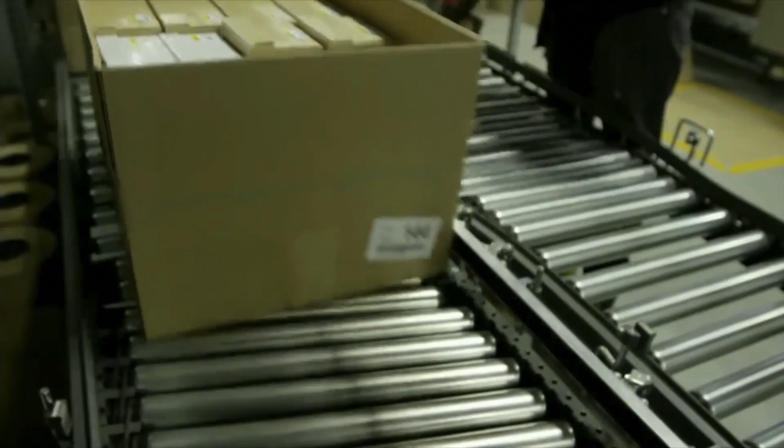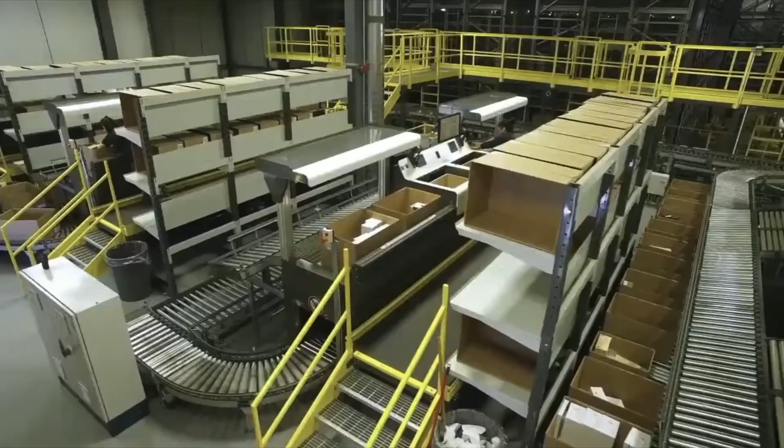At Browns, I'm the supply chain director. I take care of transportation, distribution center activities, as well as all of the e-commerce. Browns is a family-owned business. Last year, we just celebrated our 75th anniversary. We operate under the B2 and Browns banners. Overall, we have just over 1,200 employees. I think that every Browns employee is very proud to work for a company that donated 10% of its pre-tax profit year after year. In 2014, we were at the point where we had 3 warehouses. All 3 of them were at full capacity. So as a company, we decided to invest in a new facility. One of the things we looked at was a state-of-the-art automation system.

All right. Thank you, Alex, for when you watch this later. So that was it. Basically, oops.

We go back. All right, so a little bit of context about the project. So Brown Shoes, like he said, new facility in 2015, a nice distribution center and headquarters, and they have implemented their first ASRS, so automated storage and retrieval system, which is basically an automated warehouse for storing all the products. And you'll see the word OSR pop up in different places in this presentation. The OSR is basically the same thing as an ASRS. It's just a branding thing from their equipment provider.

So picking stations, that's what we are focusing on here, so goods to person. Basically the products, all the shoes, are stored in big cartons in the ASRS system, and then depending on whether they're fulfilling a web order or a stores order for a certain number of different specific SKUs that they need, this system will call the proper cartons that come all the way to the picking stations.

They move up, and then they just scan the right box, put it in the other box, and it goes out for the actual order to the destination. And that's, in a nutshell, what this is about. Now, what happened between Brown Shoes and SimWell: we started in 2018, actually. We built the first model for them.

It was another simulation software, actually, at the time. It was focused on just the picking stations themselves, and it was already an interesting project at the time. We actually used it as well for a simulation competition in the past, as it was a nice case.

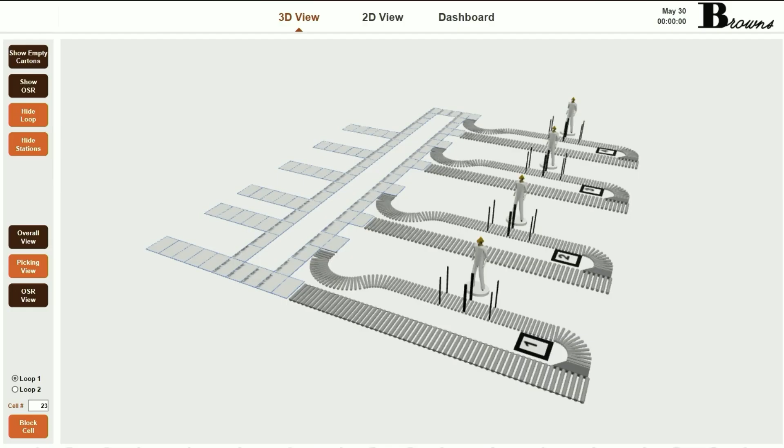And then we can also use the cloud/model manager for experimentation and sharing the model with the client, which he has enjoyed a lot until now. So we'll go with an overview of the system. Okay, so this is a video of our model here. What you see for now is just the picking stations themselves.

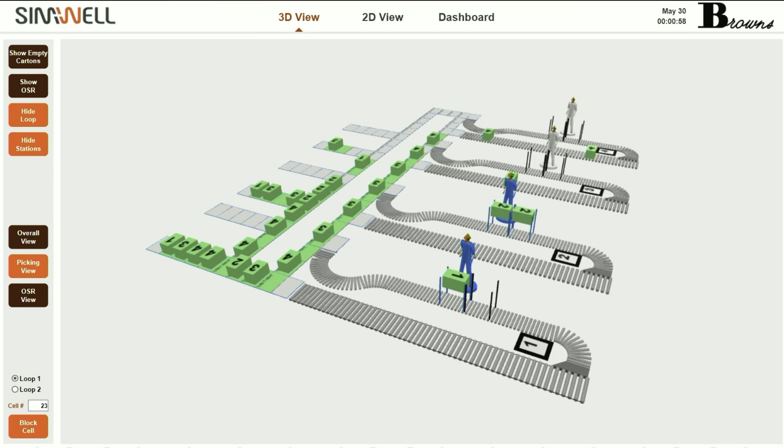So you see the cartons coming in. They have the number of the picking station they're going to be going to. And then we are not modeling the actual outbound orders. Okay, so we're focusing on just the picking activities here. So you can see when the pickers are busy, they're turning blue. So we have the delays, the proper task times and everything here.

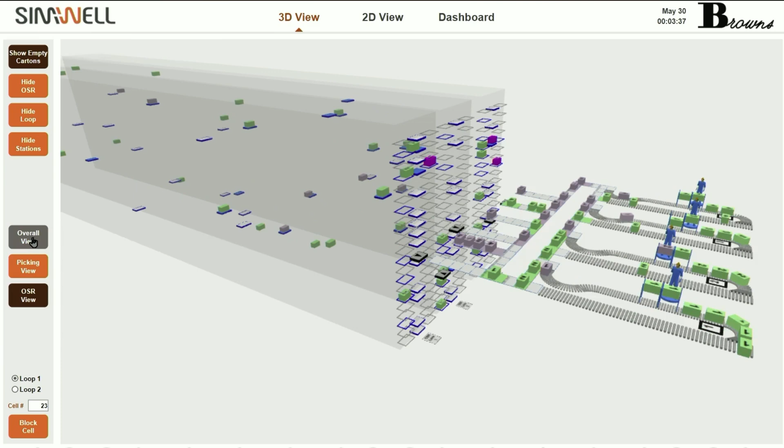And then you can see the conveyor that actually brings the cartons from the ASRS system. So now we're showing the ASRS system, which is the three main lanes. And they have the lifts and shuttles, which basically retrieve the cartons from the different cells and bring back the cartons at the end and store them again.

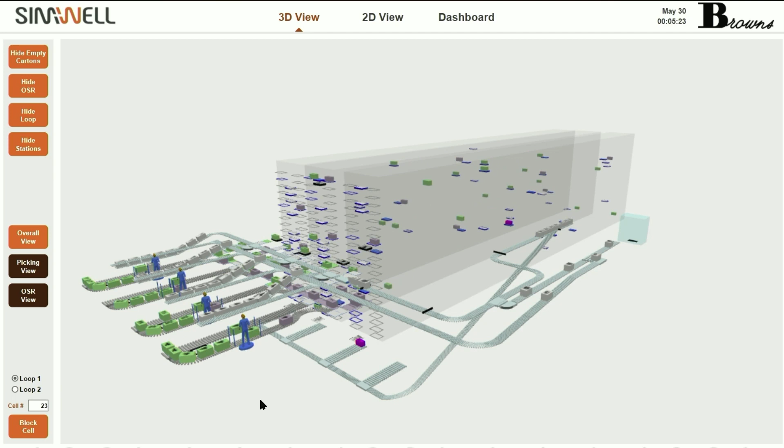Then we turn on the other layer, which is the empty carton system and the decant station. So on the far right, you see that box, that little thing. I can't point, but I think you see what I'm talking about. So this is a possible expansion option. They want to look at the carton erector, which is a machine that just folds the carton and saves time for the pickers to not have to always build the boxes for the orders they're picking.

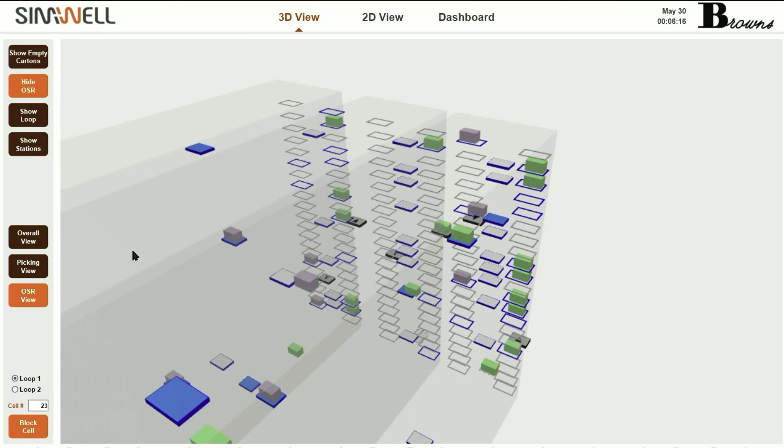And then we moved around and look at the OSR or the ASRS system in a little more detail, so you can see the activity in here from that angle, the lifts and the shuttles moving around the boxes and storing them on the buffers on the side there. Okay. So this is basically the current system and one of the options. This is what we've been modeling.

And so now the purpose of this year's project was to consider a few options that they may want to invest into. So extra picking stations and potentially a second loop, which would be at a different level to have more material handling capacity, because this loop gets really congested sometimes.

They are considering a new decant station, so when they bring in new product, when they want to load up a whole bunch of new pairs of shoes in the system, decant is another area, and you could see it in the video just before, if you noticed, there was a slope conveyor, basically bringing the new products into the ASRS system, but from the bottom, below the picking area.

They might want to do another ASRS lane, so they kept space. They have 3 lanes right now, and they kept actual physical space in the warehouse where they could implement a 4th lane that would add capacity.

And so the carton erector, which I mentioned just before, and we did all kinds of sensitivity analysis on the different resources, like the ASRS lifts. They actually have failures, obviously. They can have all kinds of things happening, so scanning errors, lift errors. And also the model will allow training the warehouse operators and the managers and see the impact on productivity of the different components. So this is the overall scenarios and situations we want to use.

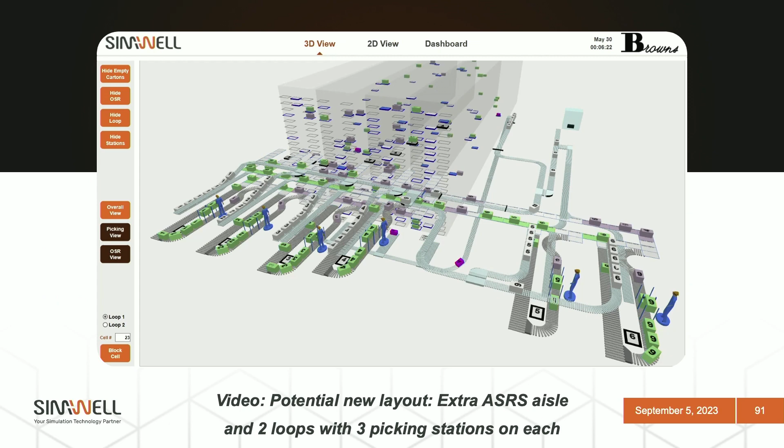So this second video here shows the same system. You can see here we have 2 extra picking stations, and you can see the second loop that was added on top of the first one. We're going to move between the views here, but because it gets busy, we created the toggles to be able to focus on different areas of the system, to view only what matters depending on what we're focusing on at any point in time.

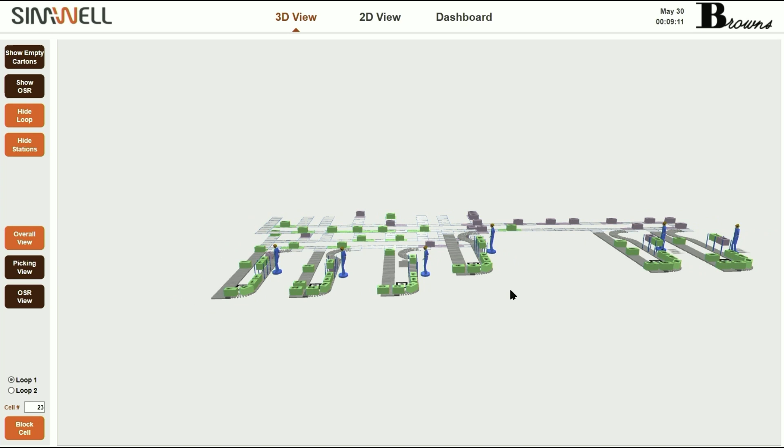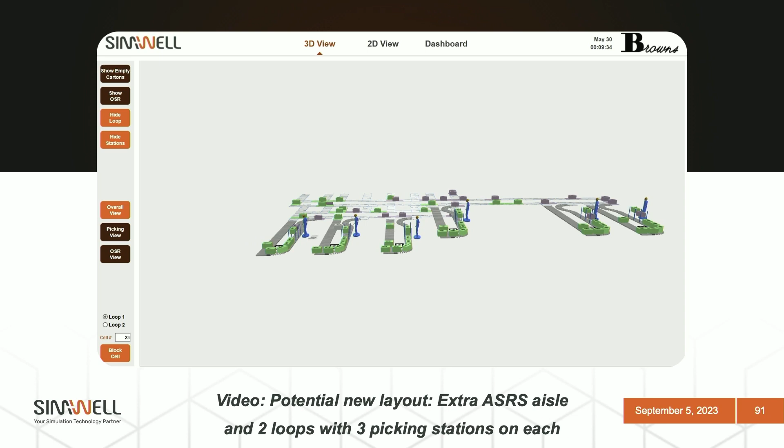So here you see that second level that would allow them to fetch and put away more cartons and to have extra picking stations. In this case, they would connect 2 new stations. 1 station would move to the second loop, and the 2 new stations would go to the second loop, to balance things out. So that's a possibility.

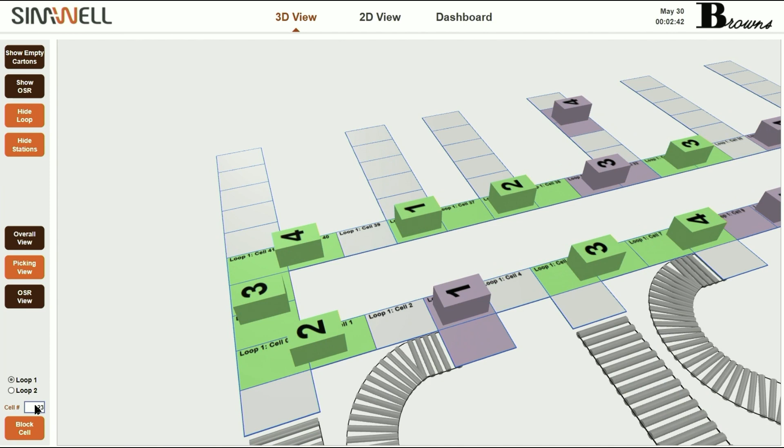So another nice feature we want to illustrate is that we've been using the model to make sure that the conveyor was really realistic and validate the behavior. On the bottom left, we see the user clicking that little edit box, and then they're selecting a cell and blocking it. In real life, it happens. A carton can just pivot a little bit, something happens, and then it blocks one of the cells.

And then we can see the ripple effect, we can see the boxes accumulating, and then at some point the user, as in real life, goes and removes the box that's holding up everything. I'm speeding up the view there, you'll see it in a few seconds, and then we can check how the system reacts and see if the recovery time after this incident is realistic.

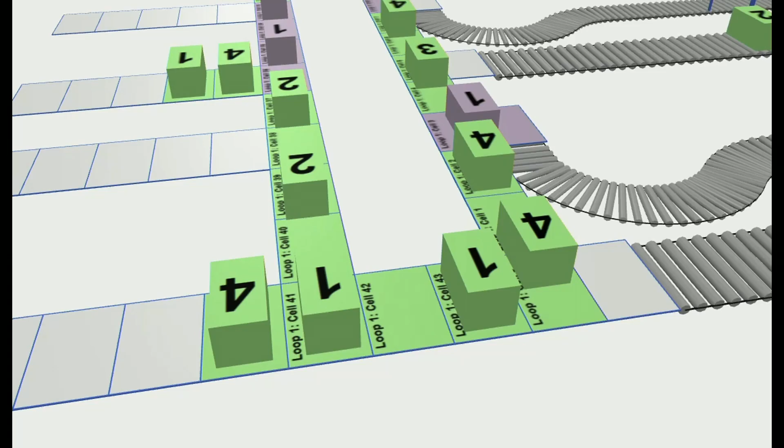Okay. I guess I can skip it. Okay, so here, there you go. So, am I already here? Yeah, okay, sorry.

So now we're at the stage where I want to discuss a couple of the key technical challenges we were facing while building this model. One thing in particular is that this exact conveyor type is not a built-in feature of AnyLogic. It's roller conveyors, but they have a sensor at each physical space where the carton can sit, over the entire length of that loop.

So in these cells, there's a visual sensor, and any time a carton moves, it releases the previous cell. Once it completely releases the previous cell, then the carton that follows can enter that cell. So that's how it gets controlled. So that's it.

So basically, to model this, and I want to just start the video again, but it goes full screen, and then you lose the rest of the slide. Doesn't matter. So you can just focus on what you're seeing here, which is what I just described. So every carton just has to stay. There's a different delay when you're moving sideways and turning 90 degrees there, translating in a corner, and so on.

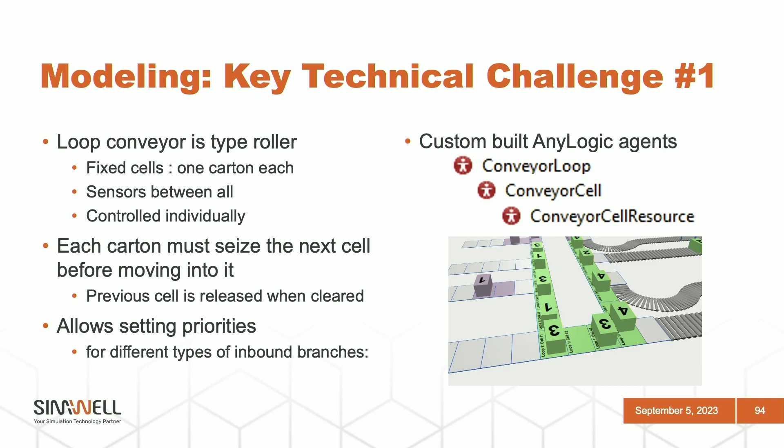Another interesting challenge, obviously, was the ASRS/OSR system. So it's a 3D structure, obviously, and the objects are the lanes. So you saw 3 lanes there, and each of the lanes has 2 lifts. And then there's the shuttles. So every level has a shuttle that goes just horizontally and either retrieves or puts away a carton. And then they move them all the way to nearby the lifts, but then they have to wait because you can't just always transfer directly to the lift.

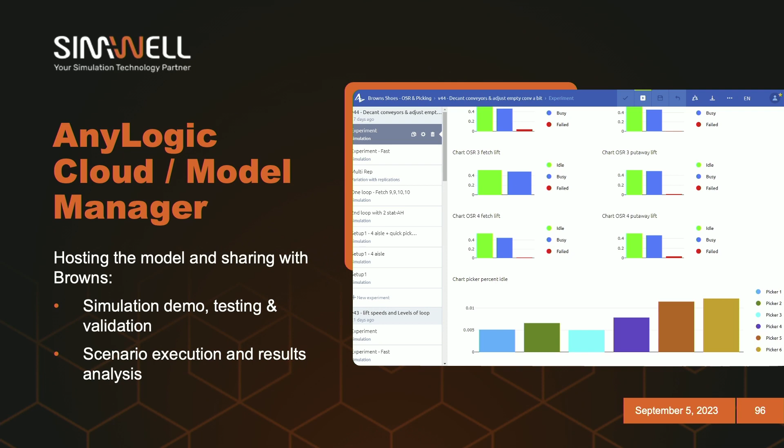So next, model manager. So a quick print screen to highlight the benefits that the client and ourselves have gotten from actually sharing the model using the AnyLogic cloud here. And so for demonstrating the model at first, as we develop it, we could share a version with the client. He could just look at it on his own time, give us feedback. That was very helpful. And then testing and validating results and getting some outputs of different scenarios and analyzing the results directly or downloading results if we want. So it's been a great asset to bring into this project. So much appreciated. And next.

So next steps. So this project is far from over. Basically the modeling is done. We don't really need any new features, but at this point there's a lot we still want to test. The client, just in terms of timing, it just happens that we didn't finish testing everything, and he's going back and forth with his equipment provider. He actually uses the model to show to his automation system provider: we've been modeling this, it looks like that, can we do this, is this possible, how much would that cost, and so on. So this is really helpful for the client to be able to demonstrate using the model and discuss with his colleagues as well what we want to do here.

So one example is earlier I said there's the 2 loops, and then you got the 4 original stations. They may want to migrate one station to the second loop, and then after we did this presentation, he talked to the equipment provider, and apparently it's not that much of an option. So the original 4 stations would probably stay on the first loop, and then he would have to put two more. The only new ones would end up on the second loop. So it's a living project, and that's where we stand at this point.

So there's a few things that might happen. So next step, one of the most plausible options is that they're going to implement the empty carton feeding system with the erector, and basically at this point, the model allows us to test different configurations, exact routing of the conveyors, so that it has to work with all the other conveyors in place.

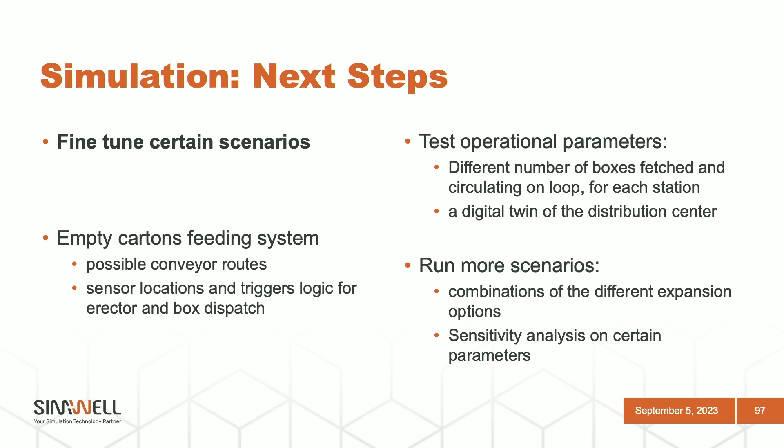At this point, we need to run more scenarios. We're going to be testing combinations of these different features we've been implementing, making sure they make the best decisions possible. They're evaluating different CapEx scenarios, estimating implementation cost, calculating potential benefits, increased throughput, decreased operational costs, and like I said, the empty carton system is likely to happen.

What's good news now is we have this highly maintainable model. We'll keep it over time. SimWell and Brown Shoes, we hope to keep collaborating for years to come and keep maintaining this model. It can be used for different purposes, future projects and training, and just demonstrating potential operational tactics and so on. So we're getting close to having it. At this point, we can basically say we have a digital twin of this important area of the distribution center for Brown Shoes.